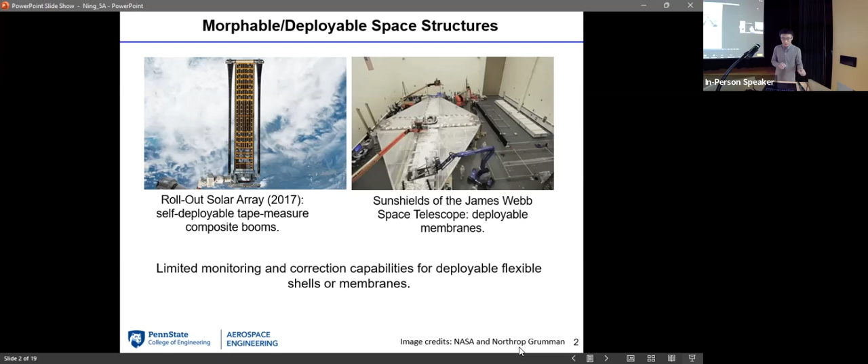There's a very critical issue. Sometimes we just don't have enough monitoring capability to know the status of the structure. And also, if something goes wrong, it is also very difficult to correct the issues. For example, if one structure is not fully deployed, it is extremely difficult to correct that error. So this is something I would like to address. Okay. So I would like to address this problem

using a different way. So I would like to view the structure as a living matter, as a living organism. So I want to make morphable space structures that can behave like the human body. So on this left side, this is the human body, right? We have some sensors on our skin, and once we feel something, for example a very hot temperature, the muscle would react to that, the signal would go to the brain, and the brain would send back some signal and we can get our hands back. So this is how the human body works.

So what I'm doing is to try to make these morphable space structures behave like the human body. So I would like to have some biomimetic multifunctional sensors on these structures, some actuating materials, active materials on these structures, and machine learning or AI to process the data. So in this way, you have a closed loop to feel the external environment, to know the status of the structure, process the data, and then react to the external environment if something goes wrong, or if you want to adapt to different status. So that is the overall vision I would like to have.

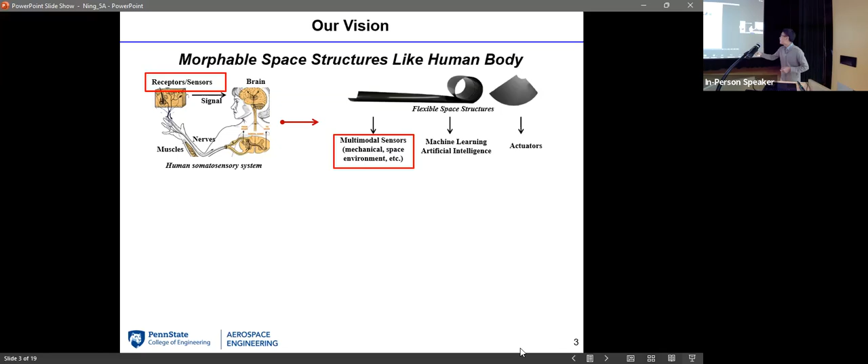So in today's talk, more focus is on the sensing part. I will focus on these multifunctional sensors. More specifically, I would like to develop large-area, flexible, thin multifunctional artificial skins for this type of morphable structures. I would like to use these artificial skins to have full-body measurements for the structure, and eventually these can be used to do actuation. And hopefully these multifunctional skins would add just a little bit of mass and a little bit of volume, without compromising the structural integrity.

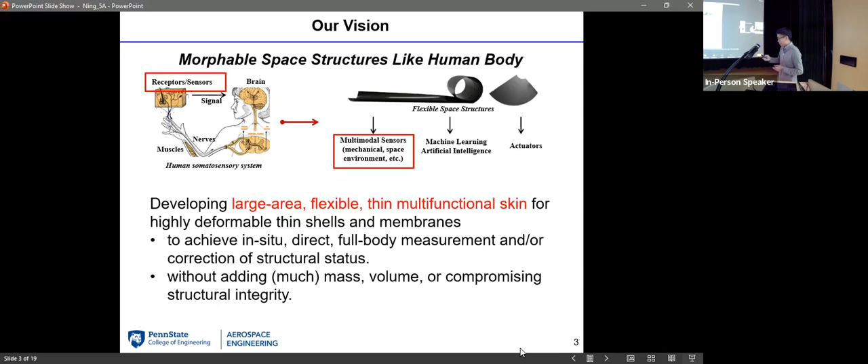So they are quite rigid and they are quite thick, and sometimes these devices are heavy. Right? So now you see the mismatch in terms of mechanics and in terms of dimension. Right? So many structures in space are quite thin and quite lightweight, and current devices are rigid, they are thick, and they are heavy. So you see the mismatch.

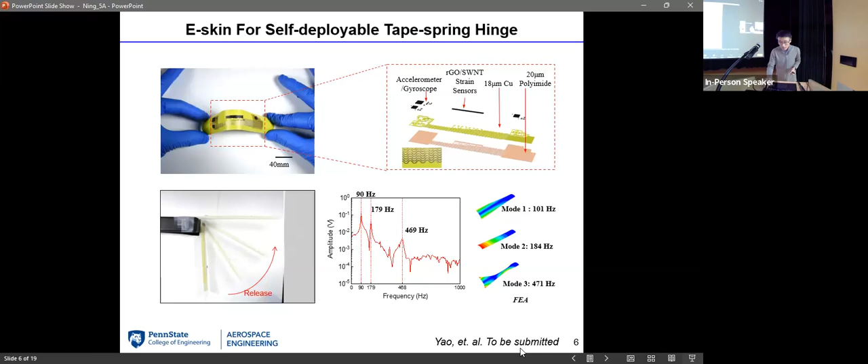All right, so I presented this work to the spacecraft structures community, and oh, sorry, I want to show this as well. So we have some strain sensors, and here we did some folding experiments.

So we can fold the tape measure like that, and this hinge, this folded region, can move to the left and to the right. It can move to this end, it can move to this end. So this folded region can move, and the strain sensor can tell where the folded region is. All right, this is also interesting to know in the folding and deployment of these types of structures.

So I presented this work to the spacecraft structures community, and there was a researcher from NASA Langley who got interested. He asked me, hey, I have an opportunity that could potentially send your work to space. What he wanted to do is to actually have this kind of e-skin attached to the composite carbon fiber ultra-thin deployable boom I just showed, right? I got interested, and I said I would be very interested to collaborate with you.

So this is the boom I just showed you, and it is a bistable boom because this is the first stable state, and when I roll it like that, right, it can stay in this folded shape. So this is the second stable state. In this shape it is locked. I don't need any other mechanism to keep the stored configuration.

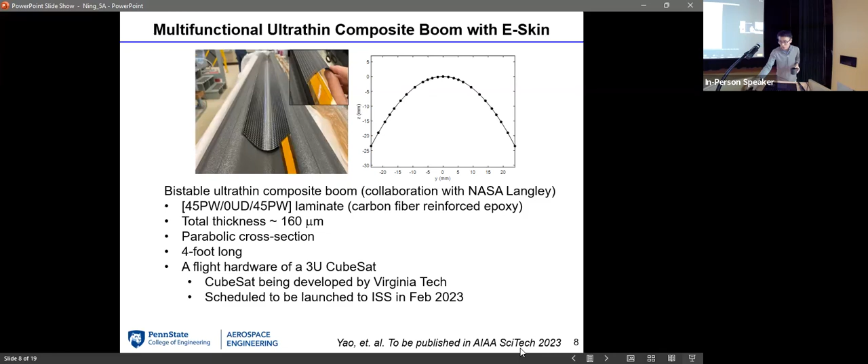The entire length is 4 feet, and that will be flight hardware installed on a 3U CubeSat. The CubeSat is now being developed by Virginia Tech, and we're going to send it to the International Space Station next year. All right, so that is some information about this structure, and now I want to show you some requirements.

We want to add some payloads on this deployable boom. First of all, we want to deliver power from the root to the end. The root will be attached to the CubeSat, and when the boom is deployed, that will be in space. So we want to deliver power from this end to this end, and we want to transmit data back from the payload to the computer in the CubeSat. So we need power and data lines in the structure, using the I2C digital data protocol they defined for us, and we want to embed the power and data lines within this ultra-thin composite boom.

Remember, the thickness of this boom is only 160 microns, and if we add lines on the surface, even 50 microns thick, we basically add 1/3 of the thickness. When we roll it, that would increase the total volume of the stored structure by 1/3, which is a lot. So we want to embed the data and power lines within this ultra-thin composite boom.

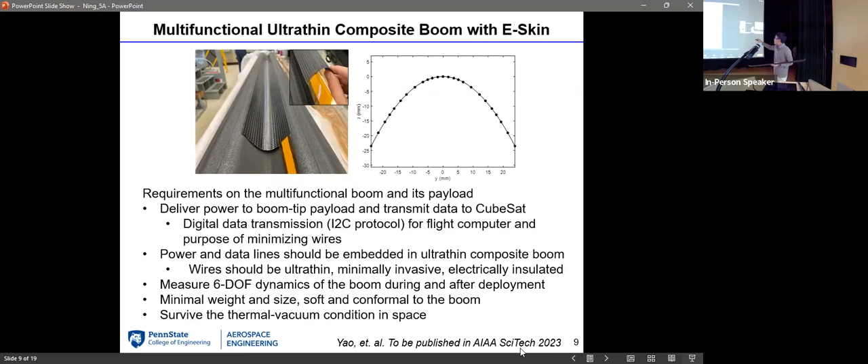And it turned out there's actually a simple solution to that difficult problem. We overthink a little bit. My student found that actually you can get very thin wires commercially available on the market. It's not easy to get, but you can get some.

So we embed these wires on the middle plane of the boom. In the middle, there's a 0-degree unidirectional lamina along the axial direction, and we embed the wires also along this 0 direction. So the wires would be in that 0-degree unidirectional ply without increasing the total thickness of this laminate. And we do the layup. We lay the wires in the composite, and then we cure the structure in an autoclave.

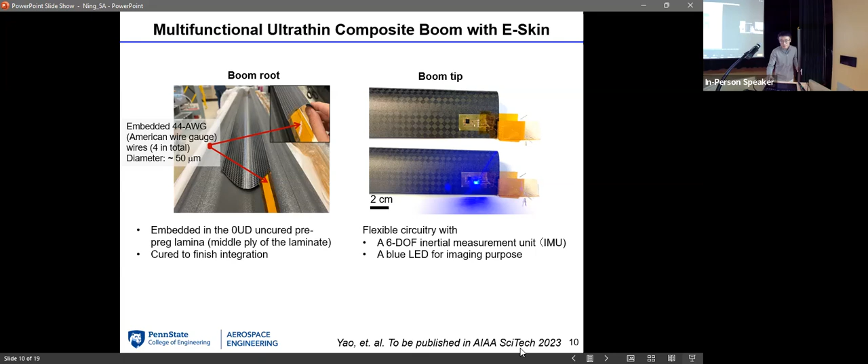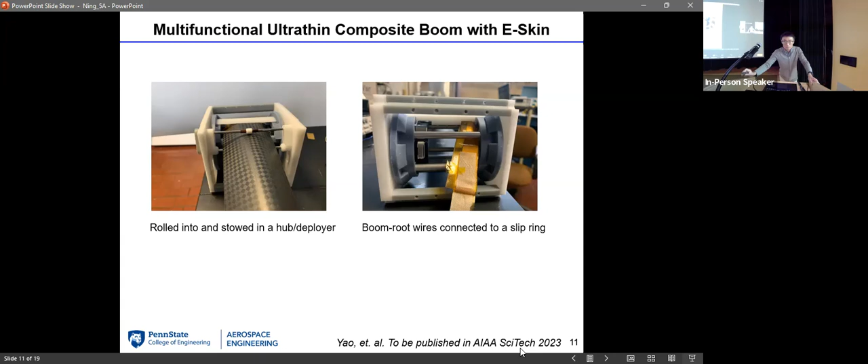And the data is transmitted to the flight computer using a slip ring. Okay, so this part is the hub and also the slip ring. Here I showed you just the initial designs. Virginia Tech is still developing the final versions for that. All right, so we put the boom in a thermal vacuum chamber, and we did some tests, and we found that the baseline is not shifted.

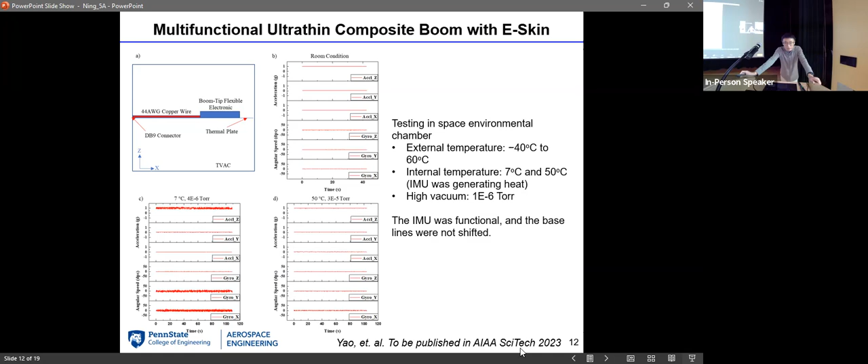So let me show you a video about this boom. We fabricated this boom, and we delivered this boom to Virginia Tech.

All right, so right now the boom is assembled. So I have the IMU right here attached to the thin wires, and the rest of the wires I'm just leaving there because they're backup wires. If anything goes wrong, we can use those wires. And this is right now mounted on a wooden board. I wrapped it in aluminum foil and then tape, just to make the surface ever so slightly smoother.

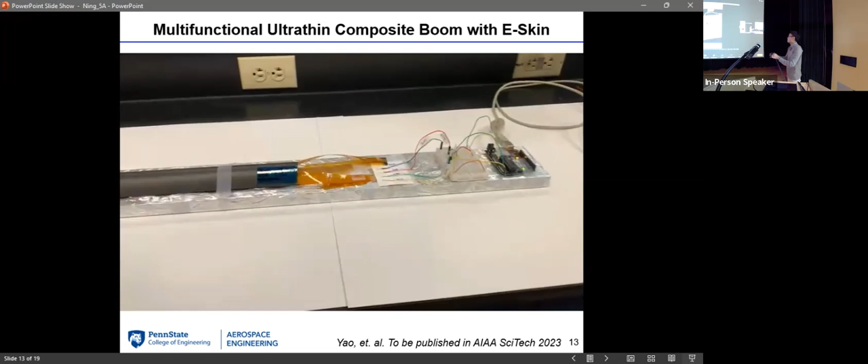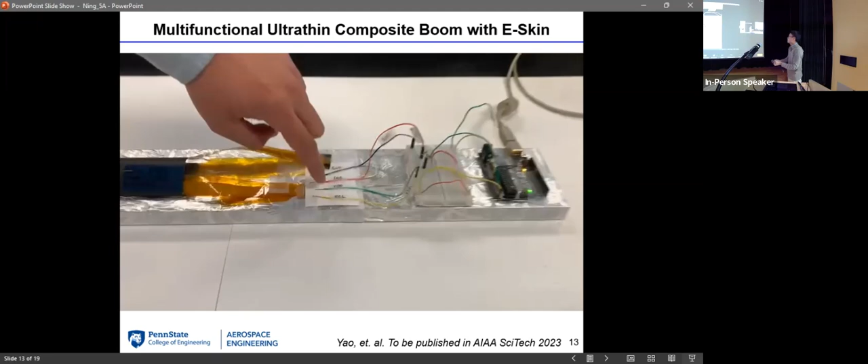And on the other side, these wires are connected to the IMU. I have soldered a few jumper wires so that you can do testing without removing the thing. I've also labeled it. You can see all these writings here. So SCL, VDD, SDA, ground. You should know where all these wires are going.

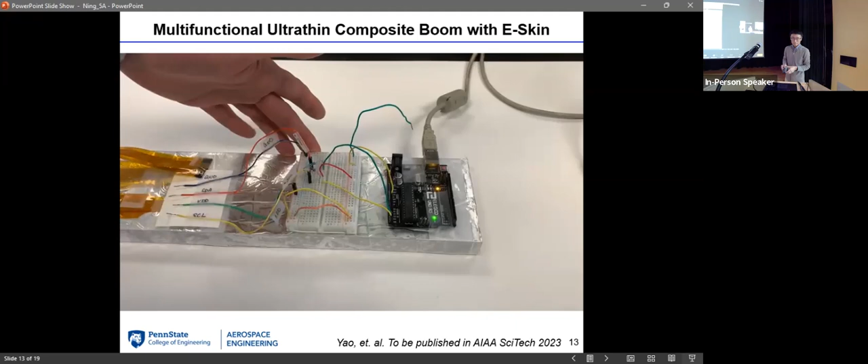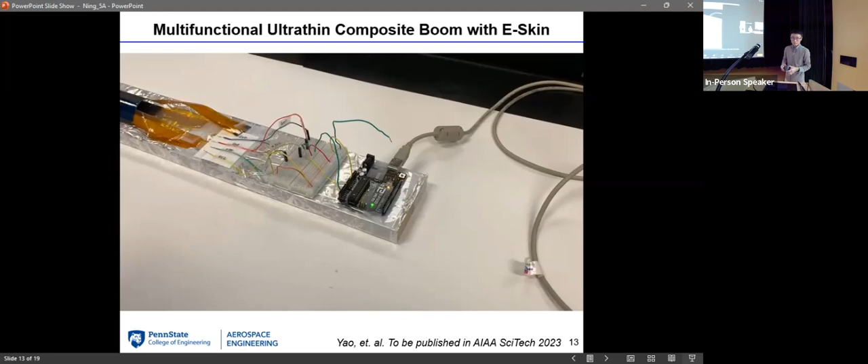So for my end, I'm using Arduino to power the sensor and gather data. This is just a temporary board for the pull-up resistors on this end, and it won't be there by the time I'm delivering it. I'm just showcasing it. So right now, I have not activated the VDD yet, but once I plug this wire in, you should see the LED on the IMU turning on. So right now, I'll plug this in, and that should turn on. So you see the LED turn on, it's correctly powering it.

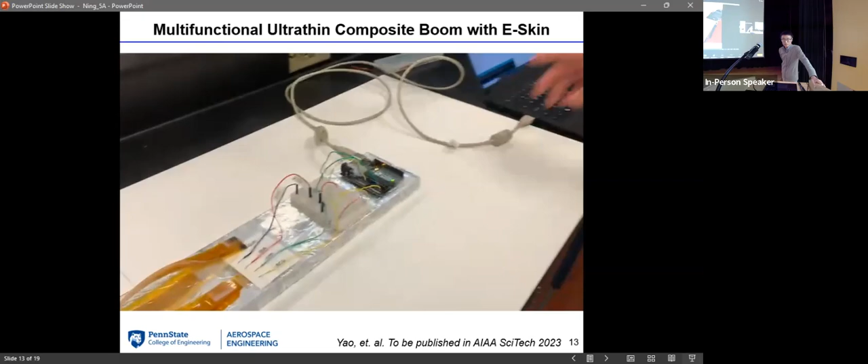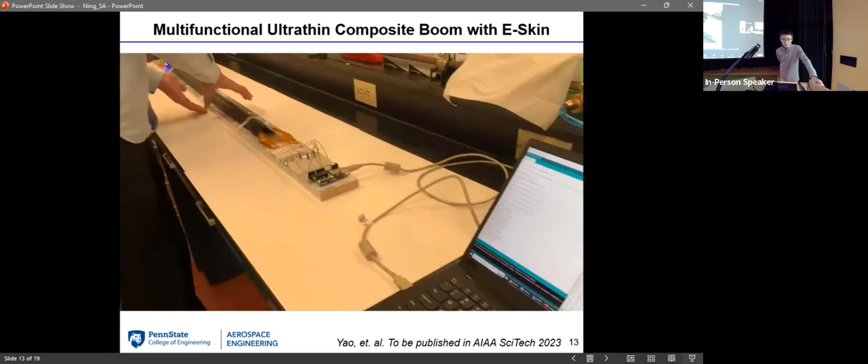Just go to the computer, and I'm hitting the reset button on the Arduino to get the data transmitted. And right here, so now it's gathering all the data. All right, so just for a quick demonstration, I'm not gonna bend the booms or anything else, just to keep it as it is. But I'm gonna lift this up and do a kind of a motion. You should see the values are changing, right? So you can see as I'm rotating the boom, the values are changing with it on the computer.

All right. I don't think I have much time. Let me. All right. So these are some tests we did, and we put the boom in the deployer, and we let it deploy, and we let it vibrate, and here it shows the vibration and also the rotation in the time domain, and then we did FFT. We got the mode for the first mode, which is comparable to the finite element analysis we did.

All right, so with this said, I just want to give you a quick overview on some other projects we've been doing. So the boom I showed you with payloads that can measure the vibration, and actually we recently got a 3-year grant from AFOSR, which can support us to develop a more advanced electronic skin with multimodal sensing capability, including strain, vibration, thermal, UV, and atomic oxygen, which can get us the full awareness of the external space environment and also the status of the structure.

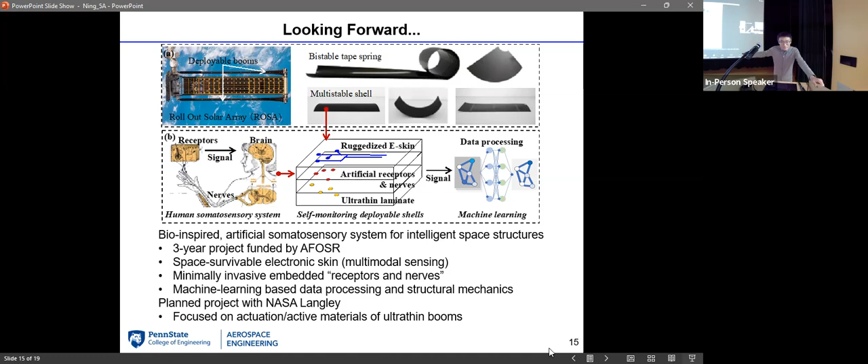There are several other projects we did. For example, here, we actually did this kind of flexible sensors, let's say a flexible UV sensor, which can measure the UV in harsh environments, and we integrated that to a wireless circuit, which can beam the data to the data acquisition module in a wireless way.

All right, so this is another project, not related to space, but for aircraft structure. So the projects I showed you earlier were for spacecraft, space structures with this bio-inspired electronic skin. So this project is more focused on aircraft. We would like to add this bio-inspired electronic skin on the surface of the aircraft wing, which can be used to measure the deformation and also the aerodynamics.

And we also would like to develop this bio-inspired bird bone-like structure. This is the microstructure of a vulture bone. And so we'd like to develop this bird bone-like ultralight structure, and collectively we can have bio-inspired aircraft with the sensing capability and the lightweight structure, and also the movable capability. So this is another project related to this bio-inspired aerospace structure.

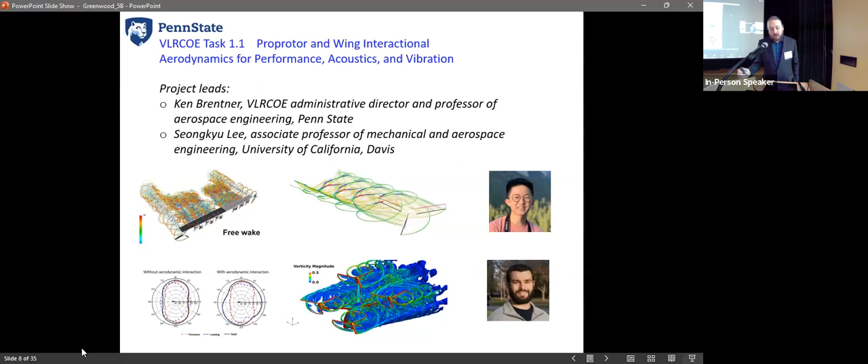Just a quick rundown of some of those tasks. There's one project here looking at prop-wing interactions and the resulting noise and impacts on performance. We have this interesting project. You may have heard about this during Mark Miller's talk yesterday, but we're really interested in the scalability of noise generated by these multi-rotor systems in particular.

So we're going to do everything here from small scale measurements to full scale, and then develop this interesting capability where in Mark Miller's group, there's a compressed air wind tunnel, which allows us to match exactly the Mach number and Reynolds number across that entire range. We're hoping that will let us connect the dots between these two scale regimes and then come up with some scaling laws for these multi-rotor systems so that we don't always have to test them at full scale.

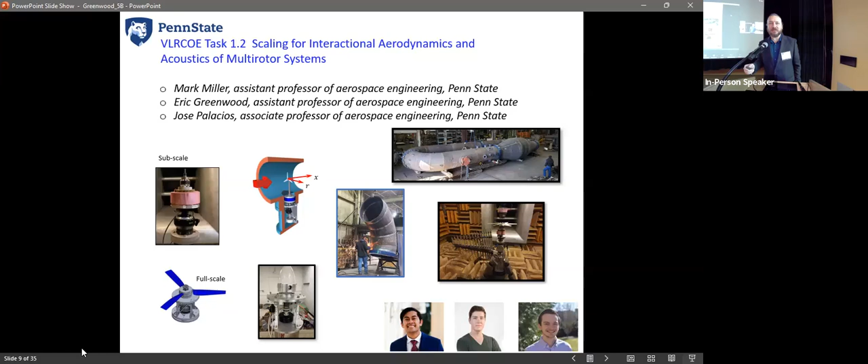And another task I wanted to highlight here is taking some techniques that are used in the flight dynamics world and applying them to a number of things, including acoustics, in order to give us rapid on-the-fly acoustic predictions.

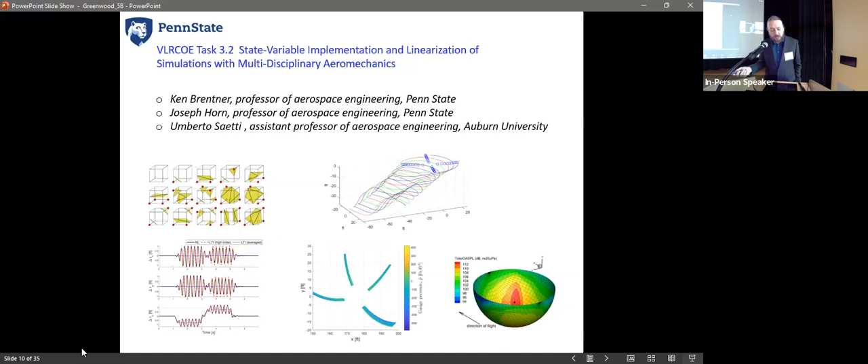So really the goal of the program that we're developing here is to enable a new class of vertical lift aircraft to be able to operate in and around communities that are increasingly noise sensitive. And we know from helicopters, right? Helicopters are getting pushed out of urban operations because of noise concerns, and there aren't really that many helicopter operations. In order to make urban air mobility work, whether that's delivering your package in a few minutes across town, or even air taxis to deliver people across town, right?

We're talking about much larger numbers of aircraft operating. And the only way that's going to work is if we can make these things so much more quiet that the community will accept that. Right. And so what I see to tackle this problem is we've got sort of 3 different ingredients. We need to do some experiments so that we can really understand the physics of how noise is generated by these new aircraft systems.

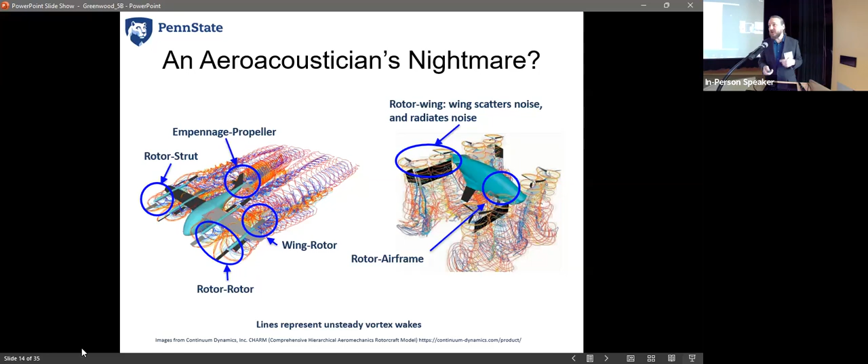And modeling and predicting that complexity is really the big challenge, right? So, these aircraft are a lot different than conventional aircraft, in that you can no longer really treat it as a single isolated rotor. I have to consider all these pieces and their interactions. So let's talk about those 3 different prongs, right? So first with experiments.

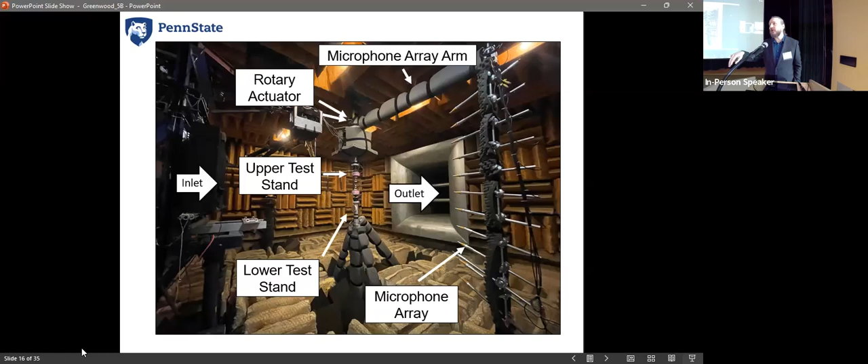We also have an acoustic traverse. You can see that vertical microphone array there on the right side of the plot. That is mounted to a rotary actuator, so we can actually swing it around the room and essentially map out a hemisphere or a sphere of noise around our test article. So we've been using this for a number of different things. I want to highlight one example.

It's a project that NASA Langley has been sponsoring us to do. They started by investigating the stacked co-rotating rotor concept. So we have two rotors. There's a slight vertical offset between those two rotors, and they are rotating in the same direction. And the initial work at NASA, which showed some promising results in terms of performance improvements and noise reduction, used a mechanical linkage to couple these two stacked rotors together so they would rotate together.

Kind of the unique capabilities that we have, and why they're interested in doing this work here, is we can do forward flight. And then we also, because we have two separate test stands, can get independent measurements of the performance characteristics on the upper and the lower rotor.

Now, the challenge with that is that because those rotors are no longer mechanically coupled, in order to keep them in the same relative position or phase relationship with each other, we need to develop a control system that keeps these two small electric motors phase locked, which turns out to be a lot harder than you would think. It took a lot of work to get that together. We ended up developing this two-phase control system to do it. But in the end, the results are pretty good.

So if I click on this with our luck, there'll be a little video that says playing.

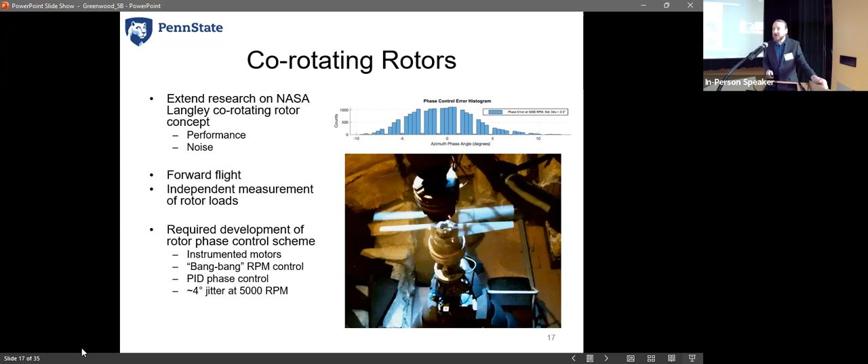And if you look at the upper and lower rotors as those phase angles approach zero, this rotor system is kind of acting like a biplane, right? You have a big influence effect where the upper rotor thrust increases, right? The lower rotor thrust decreases, and there's a phase angle dependence. And as I move them to like a 90-degree phase offset, this sort of starts to act more like a conventional four-bladed rotor that's coplanar.

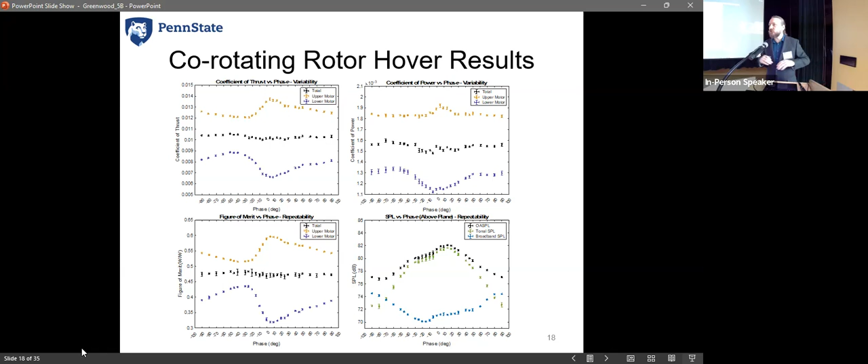We're targeting a 3.5-foot diameter open jet wind tunnel where we can hit flow speeds of around 80 knots. So something you can imagine I could put maybe a half scale, maybe a small full scale UAM rotor at a representative operating condition in here, and not have to worry about a lot of those scaling effects.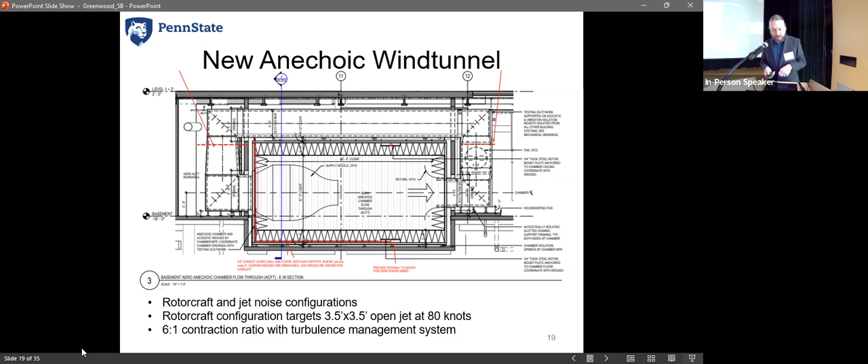And it'll have a proper turbulence management system. We want to get clean flow going through it. So that's something to look forward to in the near future. So a quick run through experiments. So next, talk about modeling and predictions. So I'll start first very simple.

So a number of you may be aware of the PSU-WOPWOP tool. It's developed here by Ken Brentner and his students at Penn State. It's kind of a general purpose aeroacoustic solver. We have developed some open source tools that are available to anybody, oriented at making it easier to use. So you can use it for some simple conceptual design studies. So we call this VSP2WOPWOP because it couples NASA's OpenVSP design tool.

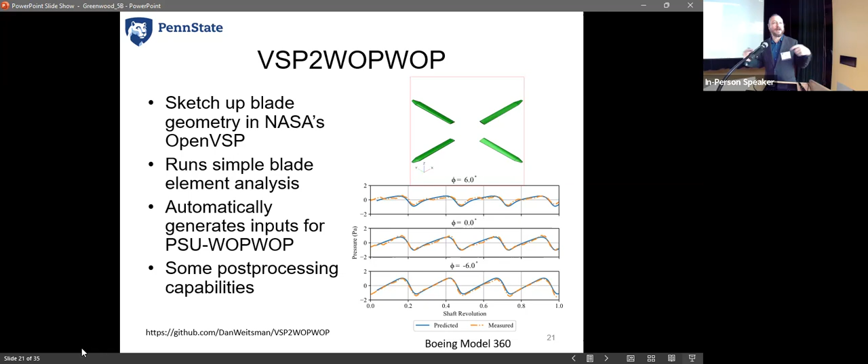We can just sketch up a rotor system like that one shown there in green. And then it automatically does some basic air loads calculations, generates all the inputs for PSU-WOPWOP and runs it. And it can do a little bit of post-processing of the data. The lower plot there shows a comparison between predicted and measured pressure time histories for this Boeing Model 360 rotor that was tested in a wind tunnel. And we get pretty good agreement for those simple isolated rotor cases. So this is a nice way you can quickly take a look at some parametric trends.

I'll give you one example here. I modeled up a notional eVTOL rotor. If you've been following the industry, it may look a little similar to you. And I did a parameter sweep, essentially changing the tip Mach number or RPM of the rotor, and then looking at how the different noise components change. So as you might expect, the thickness noise drops off really quickly. That's that blue line. As you reduce tip speed, the loading noise drops off a little more slowly, but it still falls off fairly rapidly as I reduce my tip Mach number from like 0.8 to something like 0.5.

And then any kind of unsteady loading, including our aerodynamic broadband noise, which is represented by that red curve, doesn't really drop off very quickly at all as you change the tip Mach number, because it's so heavily driven by the unsteady time rate of change of the loads, and less so by convective amplification like the other sources. And in the case of broadband noise, as I reduce the tip speed, I'm starting to ask this rotor to work harder. I operate at higher angles of attack. The boundary layers get thicker. I actually start having an increase in noise with reducing tip speed.

So for almost any given rotor there ends up being a sweet spot where there's a preferred operating RPM or tip Mach number, where you're going to generate the least noise. It's not just that lower speed is always better. And I think not entirely coincidentally, this range where we find an optimum, 0.4 to 0.5 tip Mach number, happens to be where a lot of UAM aircraft also operate.

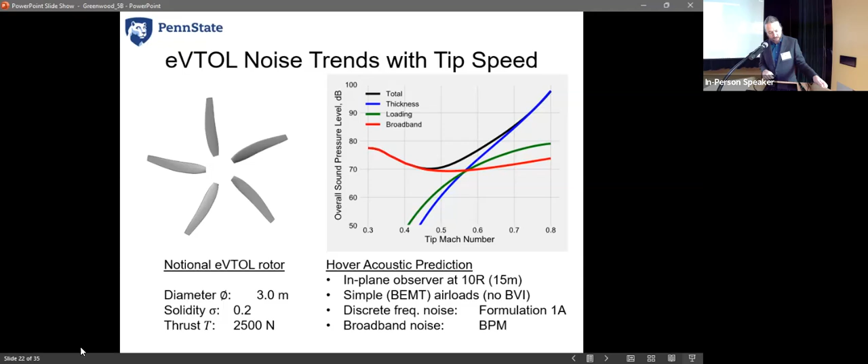Okay, now that simple system doesn't predict complicated aerodynamic interactions. We need to do that certainly to understand what's happening with these multi-rotor vehicles. But the big problem is with all of these rotors, the computational complexity increases really quickly. Modeling those rotor wakes is an n-body problem, so typically it takes order n-squared operations. And if I have tens of thousands of vortex filaments per rotor, and I have lots of rotors, this gets expensive really quickly. And it becomes difficult to do things like conceptual design when you have to wait hours to get answers for a small configuration change.

So we wanted to come up with a faster way to get a good enough answer. And so we developed a new wake model. We're calling it OpenCopter. It's based on a different potential theory approach where we don't have direct vortex-vortex interactions. And it turns out that works fairly well for most circumstances for these multi-rotor aircraft. This has been coupled to PSU-WOPWOP, and we're working towards an open source release. We have a few external beta testers now. In a few months, we hope to make it available to everyone.

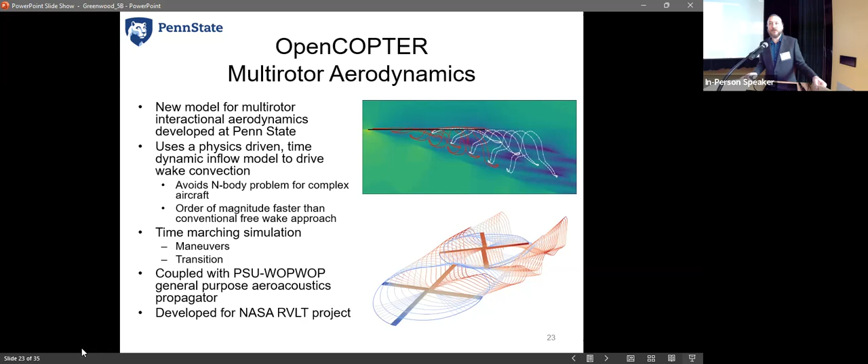There aren't a lot of good acoustic comparisons here for these kinds of rotors, but for multi-rotor systems, I do want to give you one example for this reference case we use a lot in the helicopter world, the HART 2 experiment. There's a model BO-105 rotor you can see there in the DNW wind tunnel on the left, and they had a rake of microphones that surveyed the noise underneath that rotor in a blade vortex interaction flight condition, right? So where the rotor is interacting with its own wake.

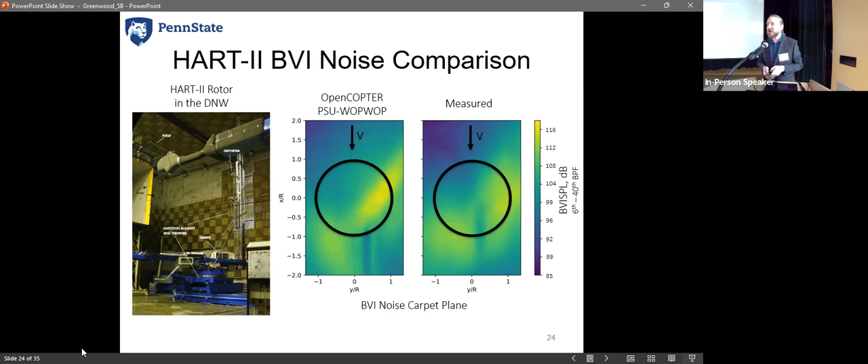So you can see here, when we look at the carpet plane of BVI noise, our predicted results on the left agree quite well with the measured results, within about 2 dB across all directivity angles. And we also matched the directivity pattern that was measured in the experiment quite well. So we believe our wake model is doing a pretty good job here when coupled with the acoustics to resolve these interactions.

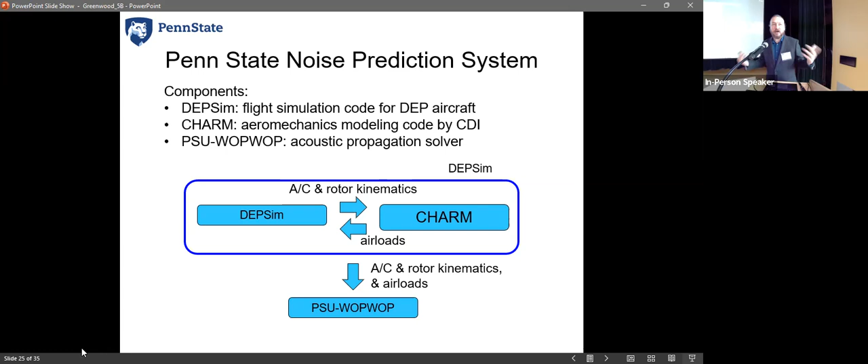Going into more detail, we're also looking at how much flight mechanics interrelates with acoustics. So we have some projects where we're coupling a flight simulation for DEP aircraft called DEPSim, developed by Joe Horn, with CDI's CHARM free wake model and PSU-WOPWOP in order to predict the noise of these vehicles in unsteady flight conditions. So I'm going to show you some examples for this notional eVTOL vehicle. It's a lift plus cruise, with 4 lifting rotors, 1 pusher prop, and a wing. And we'll take a look at a couple of different flight control schemes that you can apply to this vehicle during low speed transitioning flight.

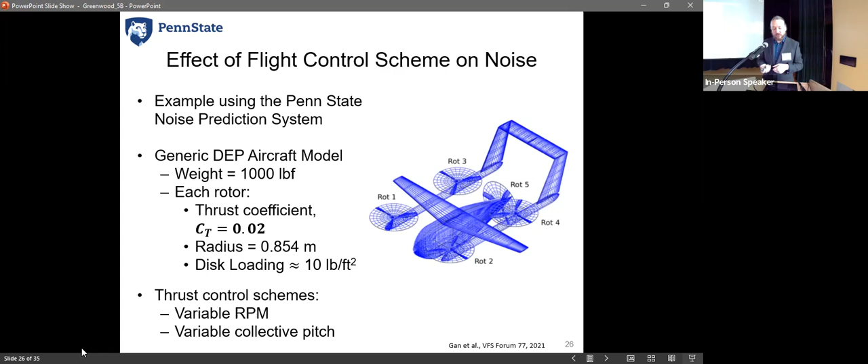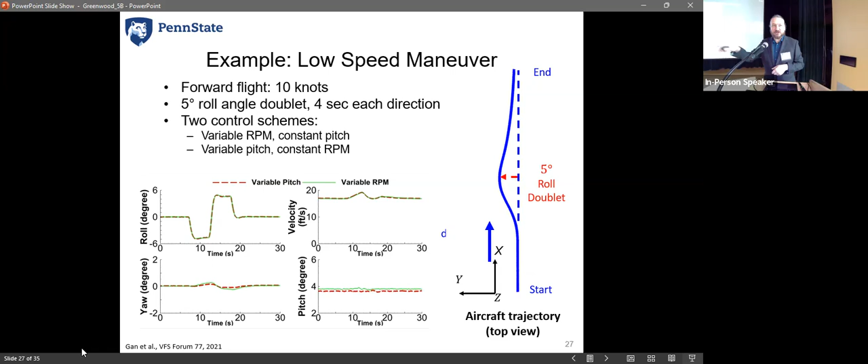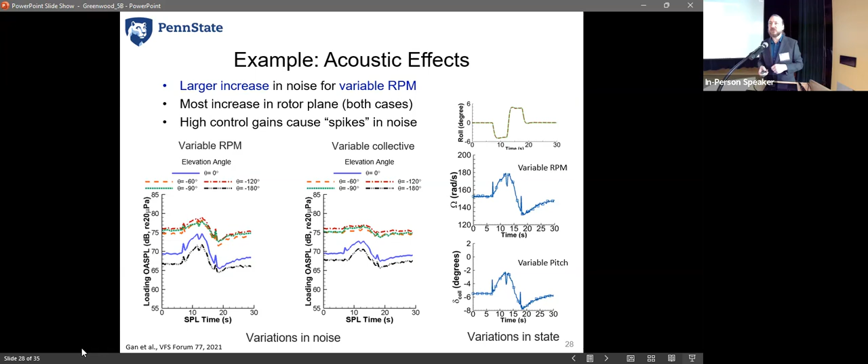Finally, I wanted to wrap up by talking about operations, right? How we can use this stuff to make UAM aircraft operations quieter. So we've developed a code here called PSU NiceOps that lets us do accelerated noise predictions for operational conditions on the basis of either pre-computed acoustic data that comes out of our models or even flight test measurements. So in this case, I'm just going to apply it to a helicopter because we have lots of good measurements for that.

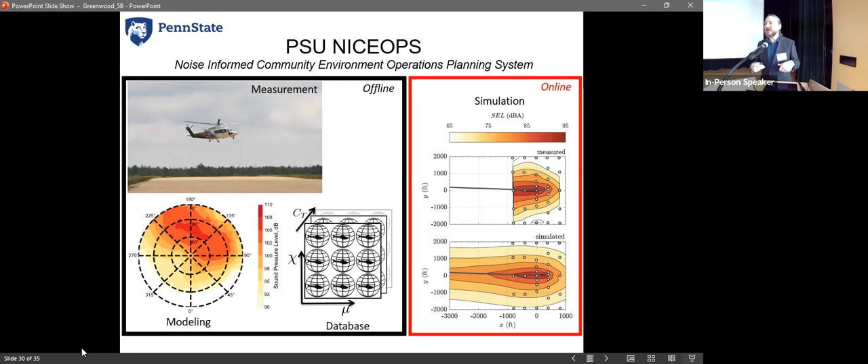So, that kind of gives us a good start. We want to increase this use of autonomy and eventually get things to run quickly enough so we can actually have them on board the aircraft. So when things change, right, the aircraft can respond intuitively right away. We don't have to follow some pre-planned flight path because everything is sort of time dynamic.

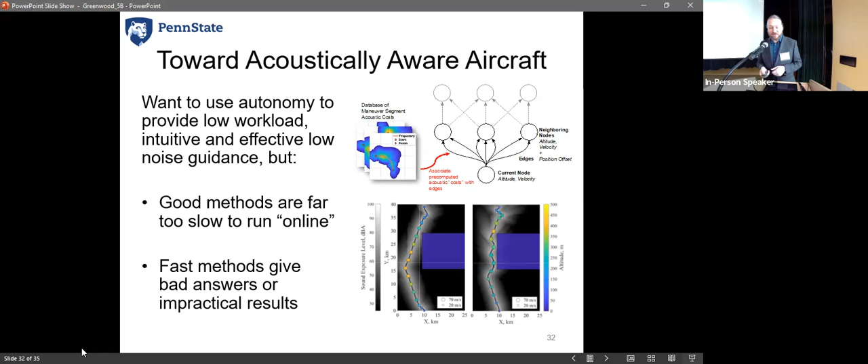And then on that top level, we can think about aircraft operating in isolation. Well, if they all choose to do the same thing, then I'm going to be flying over some poor family's house all the time.

Right, this happens with low noise air transport routes today, right? And it's not really a fair or optimal situation globally, right, for the operations of all the aircraft. So we may need to come up with some schemes in order to allow these aircraft to coordinate.

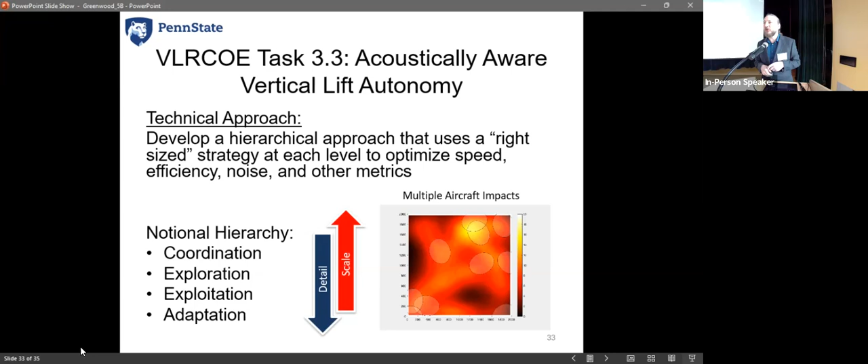So just to kind of wrap up, right, a lot of the work that we're doing right now is on multi-rotor eVTOL because they're bringing lots of new challenges. So urban air mobility aircraft and UAS. We do have some continuing helicopter projects as well.

We're really lucky here that we have kind of a critical mass of students working in all areas of rotor aeroacoustics. So I kind of counted about 15 students working mostly between myself and Ken Brentner on rotor noise in particular. And the cool thing is it's across a wide range of areas, right? Everything from experiments, predictions, to operations, which I think is really complementary, right?

A student who's working on some theoretical modeling can work with somebody else to collect the validation data that you need, and that can help support and validate the model. And sometimes when the validation doesn't work, you can sit down and think, well, what am I missing? What are the physics that are really important here? And then, of course, we're looking for applications, right? We want to use this stuff to make the world a quieter and better place.

And I hope here, obviously there's a lot of depth. Our group is focused on rotor aeroacoustics, but in that kind of niche, I'm hoping we have a full spectrum of different things from theory to experiment, and everybody sort of comes away with a good broad understanding of all of that.

So with that said, thank you very much for the opportunity to kind of share what we're up to, and I'm happy to answer some questions.

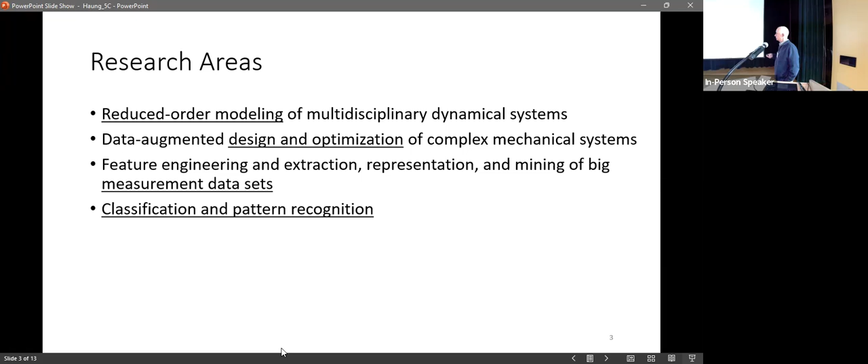So some of the research areas are reduced order modeling of multidisciplinary dynamic systems. I'll show you a couple of examples of that. Data augmented design and optimization. Then a lot of that goes back to our reduced order modeling, what we call feature engineering and extraction. These are the metrics that we can pull from our data that can be then used in decision making, and particularly feeding into classification and pattern recognition problems, which is one of the areas that I work in for machinery health monitoring.

Looking at how do we use these high dimensional tools and models to combine multifaceted and multivariable information into kind of a single prediction or inference. And then there's also a lot of focus on verification, validation, and uncertainty quantification. So we have a lot of systems with a lot of uncertainty in them, both in the system model and in the data, and trying to use machine learning to reduce that uncertainty. And then again, the theme of data-driven predictive analytics and decision-making.

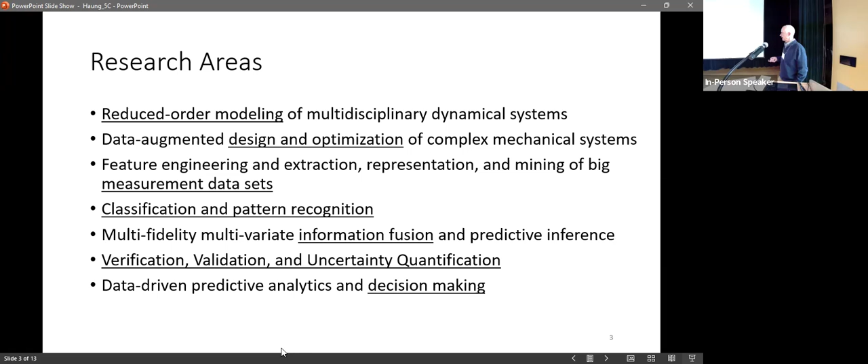We have a lot of members in the group, and I know we're not showing everyone here just because it's hard to keep track of everybody. A couple of notable additions or changes to the group. Dr. Ashwin Ranganathan is going to be a new professor starting at Penn State in January. So he's joining the aerospace engineering program and has a lot of work going on in uncertainty quantification using machine learning. And now Dr. Damien Jean-Pierre Rouault, he finished his PhD this summer and is now working in industry doing machine learning. So again, this feeder responsibility that we have to provide educated students to work with our industry partners as well.

So I'll just highlight a couple of the projects that are going on among members of the working group. And I encourage you to go to the website and download the latest annual report. There are usually one-page write-ups on each of these projects with references that you can then go and get additional details. This is a project by Kostas. It's deep reinforcement learning based decision-making and control under uncertainty. All right. So what does that mean?

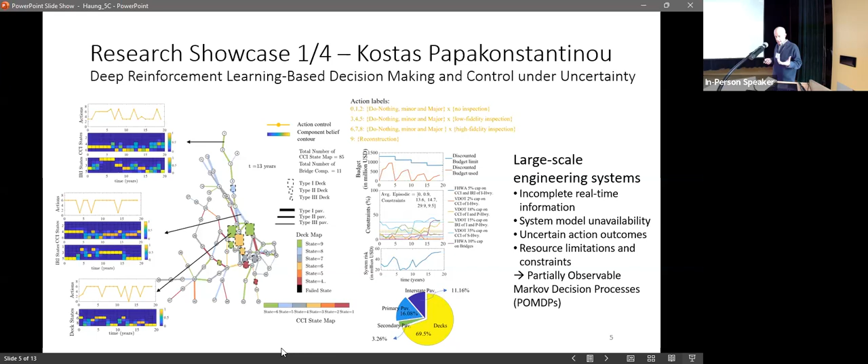Another project from Dr. Puneet Singla is looking at system identification and feedback control design for guaranteed performance. Those of you who are, oops, sorry, didn't have the right back button. Those of you who are coming from a control systems background, you might initially look at this and say, okay, well, this is what we do, right? We try to identify the system and we design a feedback control system around that.

One of the problems is that we have a lot of systems for which we have the real system, we have experiments, and we have input-output data. And one of the limitations we have in terms of designing feedback control systems has always been something called controllability and observability, which means that you can look at the inputs and you can look at the outputs, but you can't build a linear time invariant model that fits that data, because you've got internal states of the system that either are not controllable in a linear time invariant sense from the inputs, or which can't map to those outputs from an observability standpoint.

And so the idea here is to really use nonlinear system identification by building these neural network models, which inherently have these nonlinear activation functions, which now lets you get past the limitations that we have with some of the linear models. So we're not really changing the laws of physics or anything, we're just building a different kind of model. But now at least we have a nonlinear model.

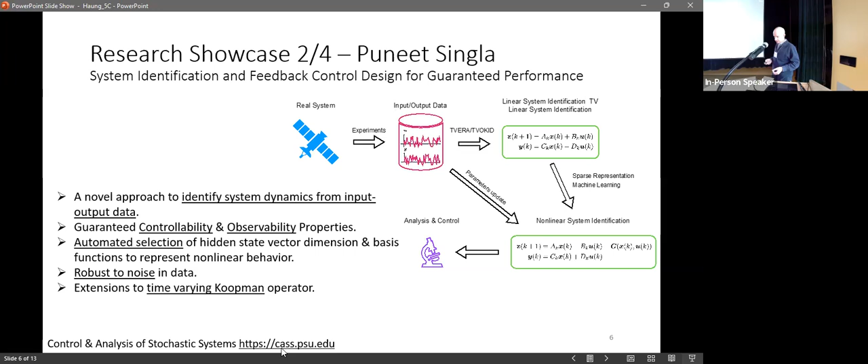And what that does is it puts some constraints on the structure of the neural network so that we can map back to some explainability. So we know there has to be a model for the system. We don't know what the model parameters are. So we use the tools from machine learning to learn those model parameters, and the underlying model that we're using encodes the physics of the situation so that we can then go back and look at what did the machine learning model learn, and how does that overlay with the model that we have, right?

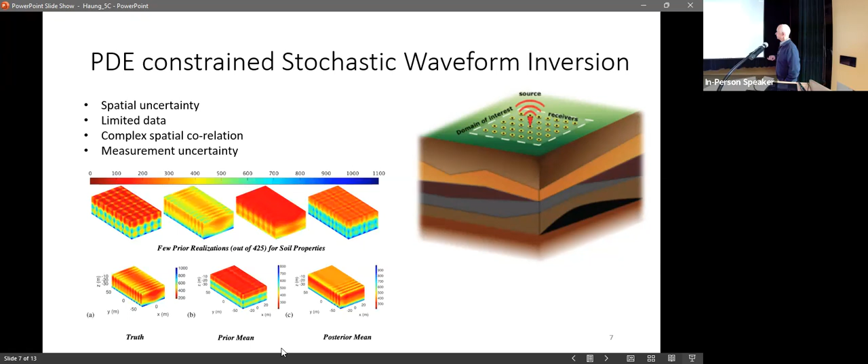Another project that Daning has ongoing has to do with modeling the thermal elasticity of materials used in hypersonics. So hypersonics is a very big research area now in engineering and particularly in the government, and also for things like supersonic flight. And so these models take a long time to run. And so with the traditional finite element modeling approach, it might take a week of computer time to generate the results of the model.

We then use neural networks to learn a reduced order model of the system, which is going to focus on the most important data points or aspects of the model. And then with the machine learning model, we can then regenerate new points. And new data that we generate is on the order of seconds instead of weeks for the model generation, because it's just a much lower order model.

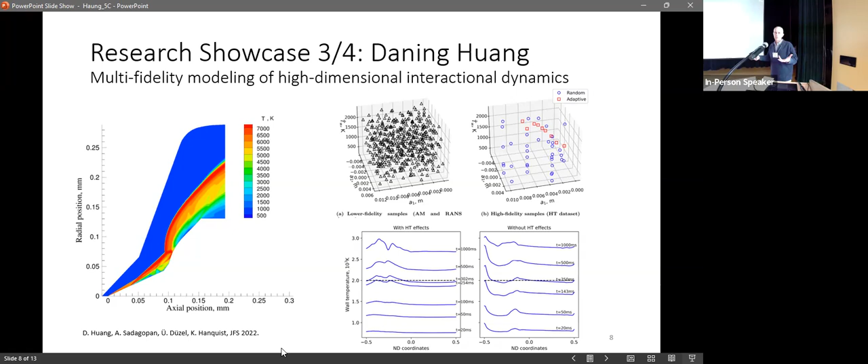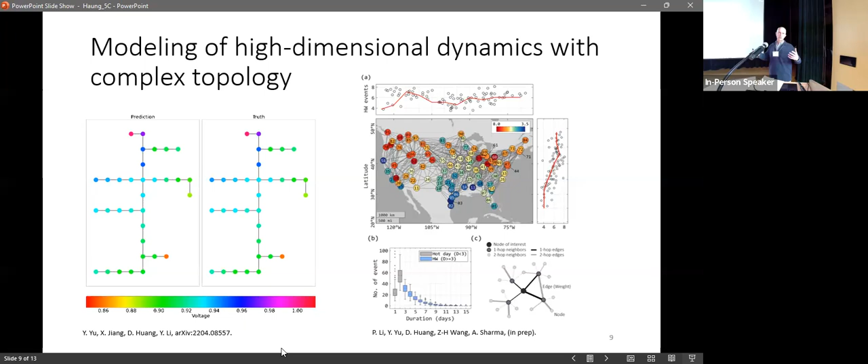Right, and that same approach will work for other types of topologies. So here we have an example of one using what are known as graph neural networks. So again, graph neural networks impose a little bit of a model structure on the system in that we have nodes in the system and they are interconnected and have interactions between them. So

Again, once we learn the graph neural network, we can go in and we can assign meanings to what these nodes are, and we understand the kinds of interactions that are going on between the nodes, that fits with our physical models. What we often don't know is the strength of the connection between nodes, or connections between nodes that we did not realize were there before. And these can lead to some interesting insights in the models.

The one on the left shows a power grid, and it shows voltage levels across the power grid. And so this was the true measurement model, and this is the result of a prediction of the evolved state of the system.

You can see good agreement there. But the same type of approach can also apply to other graph type networks. And the map that you see on the right represents applying the same type of approach to weather prediction, where the nodes here are measurements at different weather station locations. And the goal of the model was to look at past weather data and then do a 3-day ahead prediction of the evolution of those temperatures.

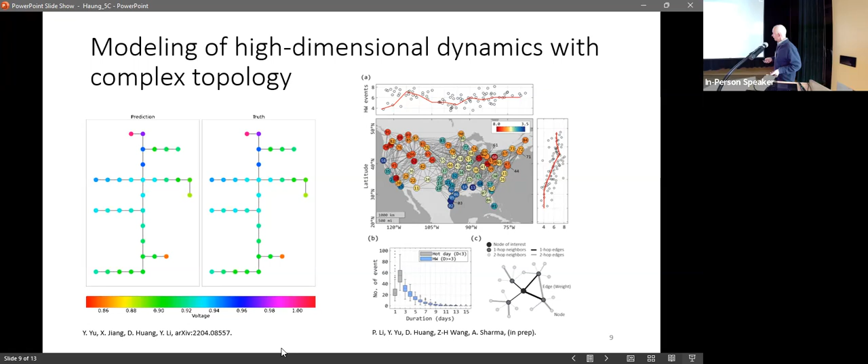Right. So the next two projects are ones under the leadership of Dr. Greg Banier, who is now at the Applied Research Lab and is one of our collaborators in the AI ML group. So I'm going to turn the rest of the time over to Greg to talk about two projects that he has going on.

Greg, thanks. All right. Yeah, thanks.

Yeah, hello. So whenever we're talking about machine learning and artificial intelligence models, oftentimes a question that one can reasonably pose is, how can I trust the result that's coming from this model? They're by nature black box models. You have a mapping of inputs and a mapping of targets or outputs, and you're mysteriously somehow trying to establish a mapping between those. And so the question then becomes relevant, having to do with verification, validation, and uncertainty quantification.

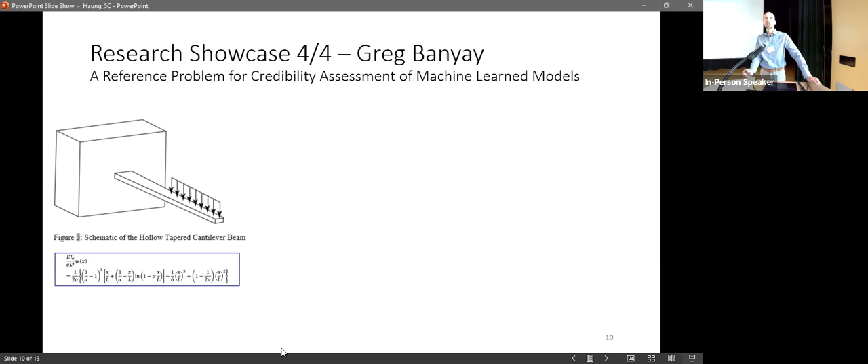So I'm interacting with some people across numerous universities, industries, labs, and so on in the context of ASME, where we've put forth an example problem that we're basically trying to promote to the engineering community to look at this example problem and see, can we benchmark machine learning models against this?

So what we took was a fairly simple problem. It's a tapered cantilever beam in bending. This problem has been studied in the domain of V&V for computational solid mechanics. And so we chose this problem in a way of establishing common ground between people doing solid mechanics and people doing machine learning and AI.

And I took this model, just wrote up a MATLAB script, and generated a number of realizations of a plausible beam in bending subject to elasticity parameters and so on, so that we can then take a data set that looks like this. I think it's only about 4,000, 5,000 lines, 6 features and 1 predictive variable. But even with a data set that's seemingly as manageably sized as this, you can take any number of different types of machine learning modeling approaches and develop different sets of predictions from those.

So it's like, which one's right? And so that's an area of research. It's an area for which there are some open questions to be asked. So imagine we're handed a black box, 6 variables, 1 output. It could be anything. So here again, we're just using a cantilever beam as a typical example. It could be acoustic related. It could have thermal relationships, any sort of other physics. And you're handed this black box and you don't know how it's made.

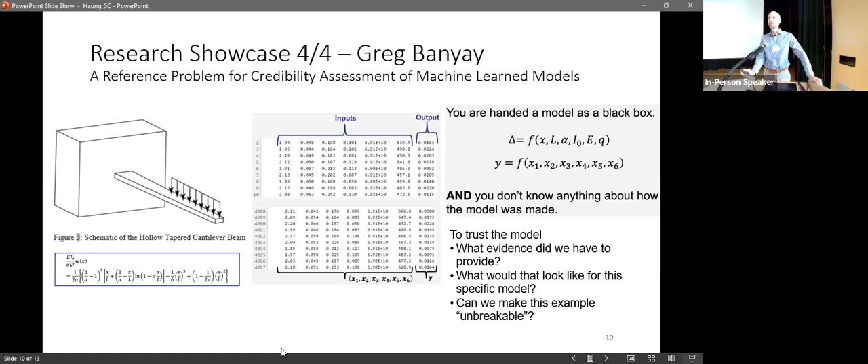We're building different types of machine learning models. At ARL, we're looking at problems that are not just simply beam in bending, but looking at, for example, vortex-induced vibrations, acoustic structure interactions, and asking similar sets of questions for how we can establish credibility for those types of machine learning models.

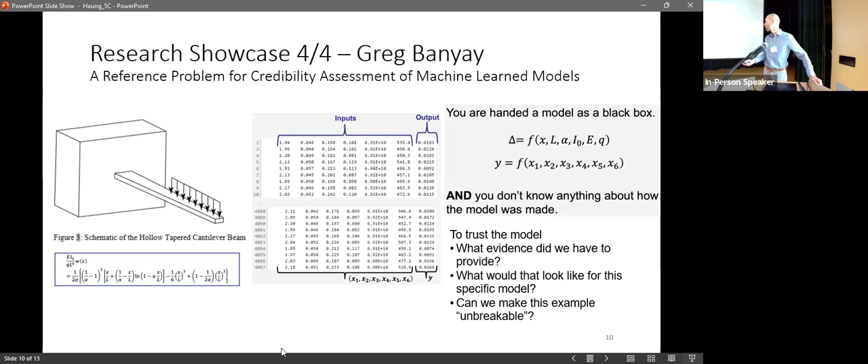A related topic to that is the notion of digital twins. And this is, in some sense, building upon work that we presented last year at the CAV meeting. But when we talk about verification and validation of machine learning models, oftentimes those machine learning models can then manifest themselves as digital twins. So a computational representation of some physical reality.

One example of that, and again, this is related to work that was presented last year and work that I did when I was at Westinghouse in the nuclear power industry before coming to Penn State. But we built a digital twin model to represent degradation within a nuclear reactor subject to flow-induced vibration, in which case thermal shields were being damaged.

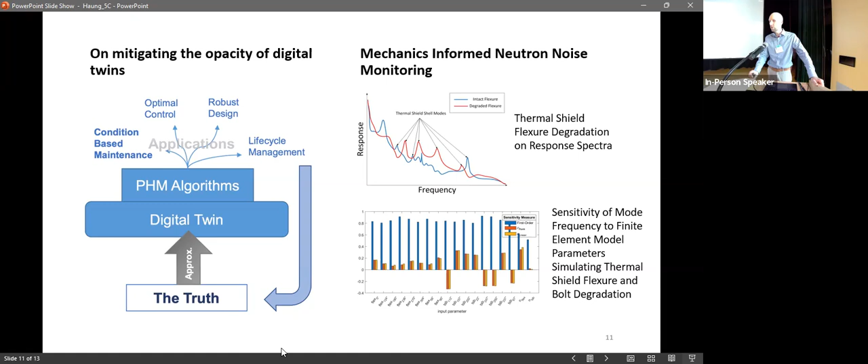And if we can then credibly diagnose causes for certain things that we've observed, then ideally we can prognosticate. We can predict what will happen in the future. And so as the maturity of our analytics increases, we then approach a point at which we can more objectively arrive at decisions without relying so much upon human input. And if we can make credible decisions that we can defend, those then become actionable and therefore more meaningful in engineering contexts.